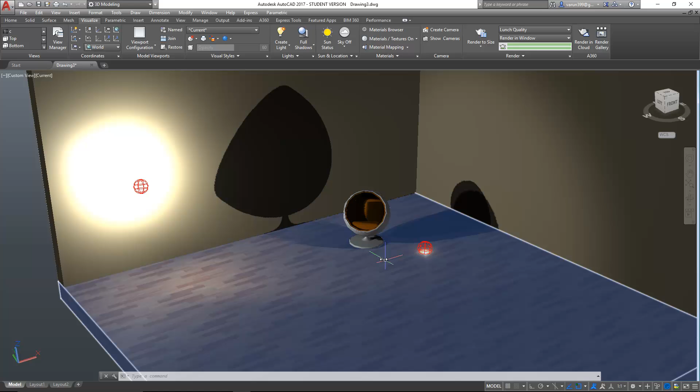I have also placed certain lights so that they fall exactly on the object. There is a web light here, another web light here, a point light from here, and a spotlight projecting over the object.

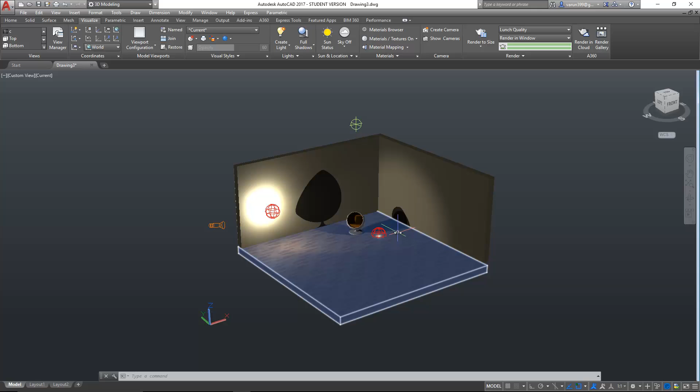As you can see here, it directly depicts a shadow over the floor as well as the wall. That is because we are now seeing it in realistic mode. So in order to get such details while designing, you have to turn your visual style to realistic like this, and adjust the shadow visibility from no shadow to full shadow like this. This will enable you to get a detailed output of the object.

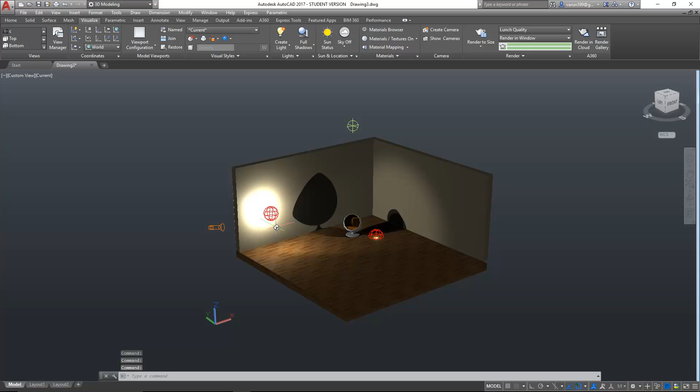Now, on less configured PCs, it will be difficult to work in this mode. So I recommend you go for no shadow like this to reduce the bulkiness of your system. You can also change your visual style from realistic to 2D wireframe so that it will be much smoother while you're working.

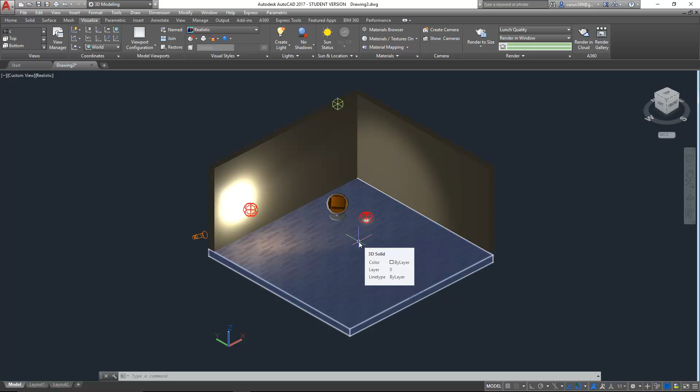Now the next crucial part is to have an exact view of the object. For that you can use two methods: either you can set up a camera, or you can set a named view. So first let me set a camera.

In order to insert the camera, I will type CAM and press enter. Now you can see that a camera has been associated with my crosshair. I will select somewhere here like this and orient the camera towards the object like this. With the default command, that is exit, I will press enter.

Now when you go and select this camera, you can see the view like this. Let me change the visual style from wireframe to realistic like this. Let me make this one slightly bigger.

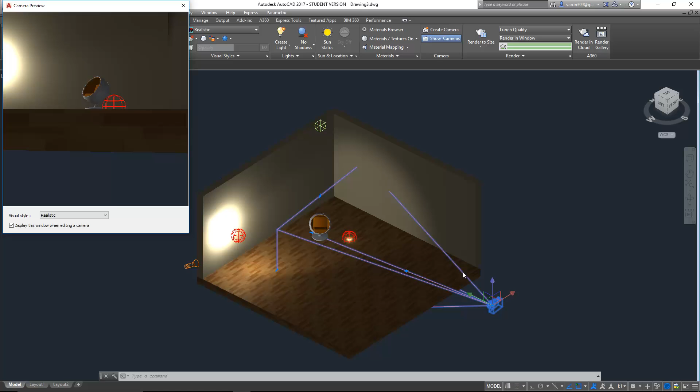Now you can come over to the camera and adjust its position. You can increase the height from here, make it much nearer like this, then orient it like this and slightly bring it downwards.

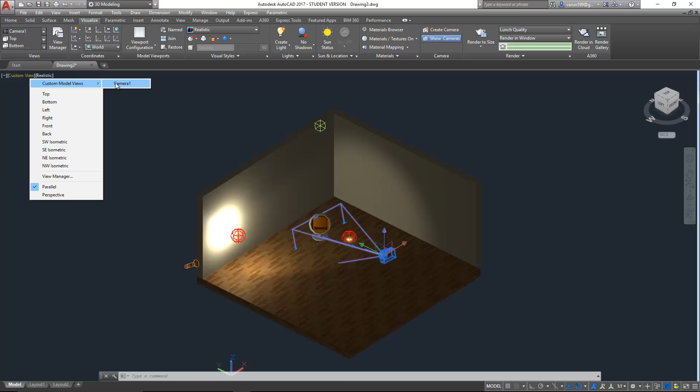Now, in order to view this object exactly from the camera view, I will close this preview and go to my custom view like this, and go for custom model views, and there's the camera. Now you can see that it is viewing from the camera. You can adjust your view and rotate it so that your object perfectly fits in the window like this.

Now as you can see here, the rendering preset is set to high. I will reduce the rendering preset for Lunch Quality to medium like this, and for the size I will go for the draft size. Now let me do a draft rendering. Correct, so within no time it renders out, and it looks much cleaner.

Now let me close this window and adjust the view slightly more. For that, this time I will use the zoom command, that is Z, and press enter. I will again press enter to get the default command, that is real time, like this. So now that I have the real time zoom command activated, I can zoom in towards the view like this.

Now let me do the render again, that is RR, and press enter. You can see that it comes out like this. In this view, we can notice that the object is slightly getting cut off from the view, so this is not recommendable. You have to adjust the view many times and check which view suits the most.

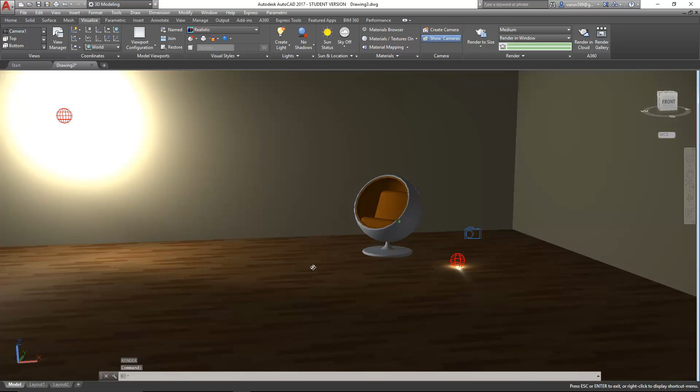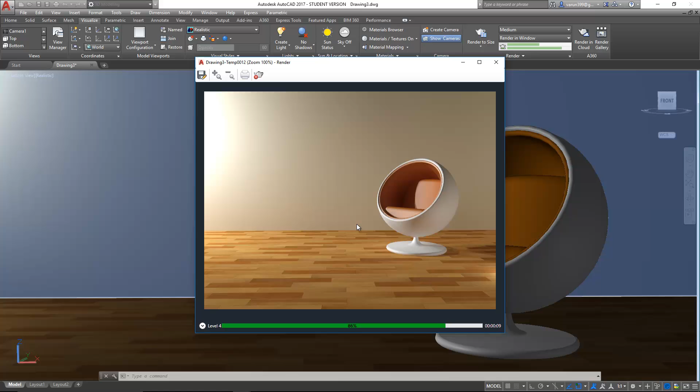Now the next way to adjust your view is by giving a named view. So for that, I will first set the view by which I want to look at the object. Let the view be like this. After finalizing the view, I will go for a draft rendering like this. Now I can see that the object is clearly visible in the view and I can fix my view for the rendering. So I will close my rendering tab and go for the menu bar.

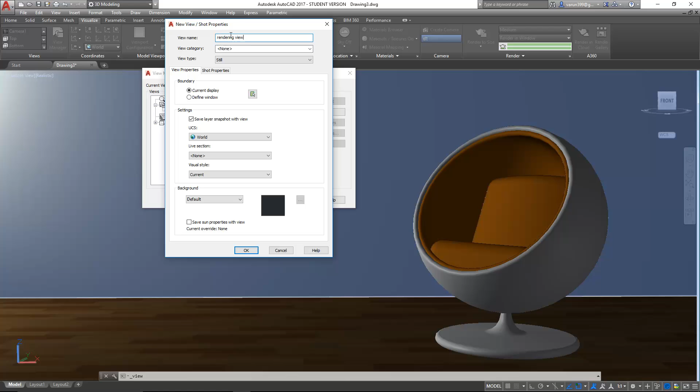In the menu bar, we have an option called View. In the View list, I have an option called Named Views. I will select Named Views, and along with the model views, I will add a new view, which is the current view by which I am looking at the object. So I will go for New and give the name for the view as Rendering View. With the default conditions, I will press OK. Now you can see that a named view called Rendering View has been inserted under the model views. So I'll press OK and it has been saved.

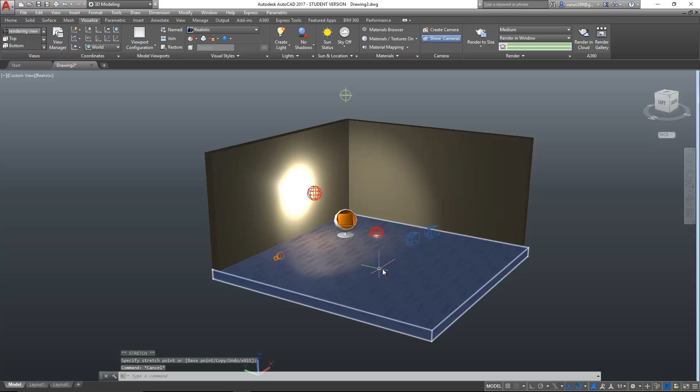Now, after I have done with the views, suppose I'm adjusting the light like this and moving this light from here to somewhere here like this. Now that I want the view back, I can go to the view like this and go for the named view from here and select the view, that is the rendering view. After selecting the rendering view, I will make it set current and apply, then OK.

Now when you do the draft rendering again, that is RR, and press enter, you can see that it is slightly more different and the light is overexposed. So like that, you can adjust the orientation of the light, objects, materials, and then finalize how to do the rendering. When you are fully satisfied with the draft rendering, you can go for the higher modes of rendering which are available here, that is lunch quality or overnight quality.

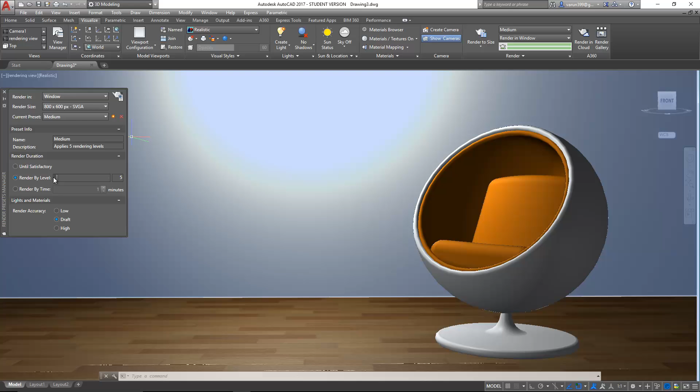So like this, you can set up your own studio and model any object and subject it to fall under the light and get the rendered image.